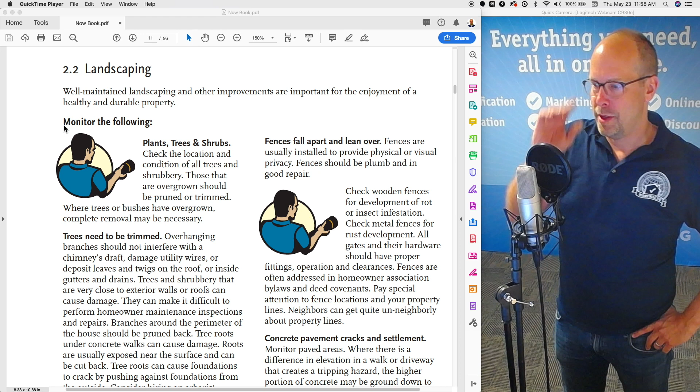During a home inspection, inspectors look at the surrounding areas of a house. Let's talk about landscaping, and maybe steps as well. Well-maintained landscaping and other improvements are important for the enjoyment of a healthy, durable property. InterNACHI believes that every home should be inspected every year as part of a homeowner's routine home maintenance plan.

During a home inspection, we should check the plants, the trees, and the shrubs, and the location and condition of all the trees and shrubbery that may affect the house. InterNACHI has a free online How to Inspect Trees course for members. You may be interested in learning a bit more than you need to know, because you don't need to inspect the entire site and environment during a home inspection according to the Home Inspection Standards of Practice. But you may want to look at what's up close and against or near the house structure.

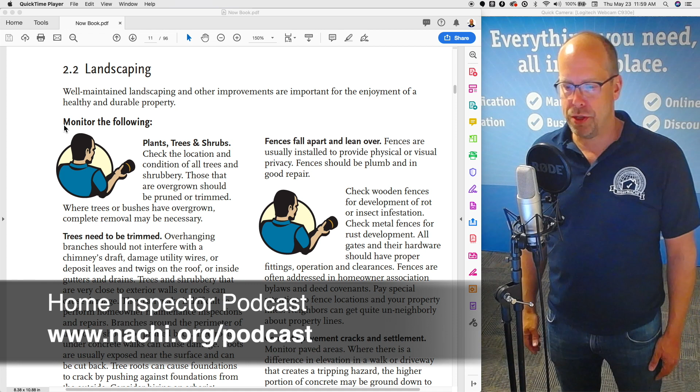Things that are overgrown should simply be pruned and trimmed, and that's a great recommendation. Where trees or bushes have overgrown, complete removal may be necessary for good home maintenance. Trees simply need to be trimmed. Overhanging branches should not interfere with a chimney's draft.

They should not damage utility wires or deposit leaves and twigs on a roof or inside gutters and drains. Trees and shrubs that are very close to the exterior walls or roofs can cause damage, and can make it difficult to perform home maintenance inspections and repairs if needed. Branches around the perimeter of a house should be pruned back.

Tree roots under concrete walks can cause damage. Roots are usually exposed near the surface and can be cut back. Tree roots can cause foundations to crack by pushing against them from the outside. Homeowners should consider hiring an arborist, a specialist in the cultivation and care of trees and shrubs, including tree surgery, diagnosis, treatment, and prevention of tree disease, and the control of pests.

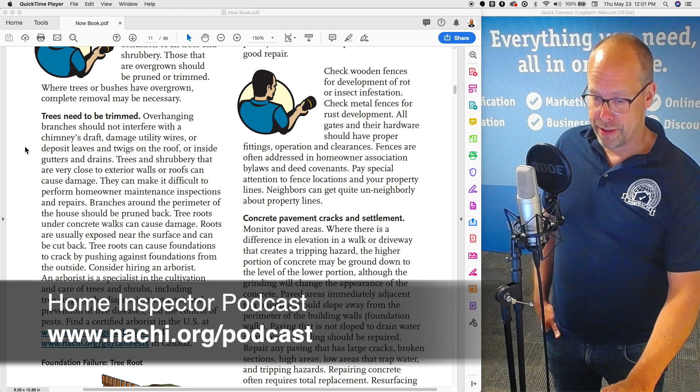Now, fences, over time, fall apart and lean over. And that's a good thing to tell my home inspection clients. Fences are not part of a home inspection. I may look at them only out of courtesy.

I will incorporate them when inspecting a swimming pool, spa, or hot tub. And if I know my clients have pets, dogs, and small children, I'll take a look at the fence. Or if my client asks me to look at the fence, I'll document my observations. Fences are usually installed to provide some kind of physical or visual privacy. Fences should be plumb and in good repair.

As a home inspector, I'll check wooden fences for the development of rot or insect infestation. I'll check metal fences for rust development. I'll check all gates and their hardware, which should have proper fittings, operation, and clearances.

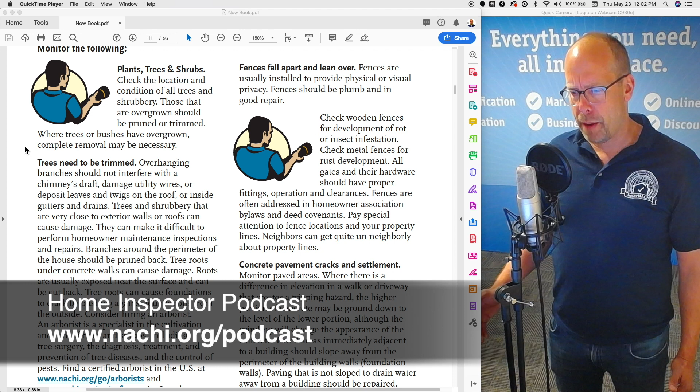Fences are often addressed in a homeowner association bylaw or deed covenants. Pay special attention to fences and locations and property lines. Neighbors can get quite unneighborly about property lines. So property lines and things like that with fences, that's not part of a home inspection. It just makes sense.

Concrete pavement cracks and settlement, those areas need to be monitored. All paved areas need monitoring. Where there is a difference in elevation in a walk or driveway that creates a tripping hazard, the higher portion of the concrete may be ground down to the level of the lower portion, although the grinding will change the appearance of the concrete.

Paved areas immediately adjacent to a home should slope away from the perimeter of the building and foundation walls. Paving that is not sloped to drain water away from a building should be repaired. Repairing any paving that has large cracks, broken sections, high areas, low areas that trap water, and trip hazards are needed. Repairing concrete often requires total replacement.

Resurfacing with a thin layer of more concrete can't repair concrete - it never works. Concrete should be no less than 3 inches thick, and that thin resurfacing is just like a Band-Aid. Cracks in concrete can be cut open and sealed with a flexible sealant compound, which will extend its service life. For sidewalks that have settled downward, it may be possible to lift up sections.

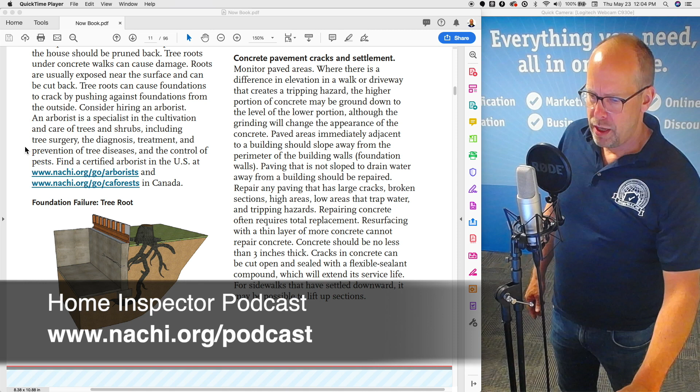Asphalt: sealing asphalt paving can extend its life. Homeowners should seal coat their driveways every 3 to 5 years or so, and examine the paving to determine when sealing is needed, if at all. Check asphalt driveways for sunken areas that hold water or may hold water during a home inspection, or really large open cracks. Low areas in asphalt paving can be brought to level with an asphalt repair, and they work pretty well.

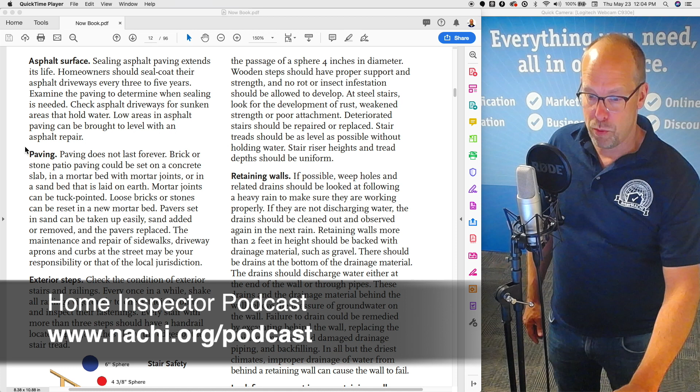Paving doesn't last forever. Brick or stone patio paving could be set on a concrete slab, in a mortar bed with mortar joints, or in a sand bed laid on the earth. Mortar joints can be tuck pointed, and loose bricks or stones can be reset in a mortar bed. Pavers set in sand can be easily taken up, sand added or removed, and the pavers replaced.

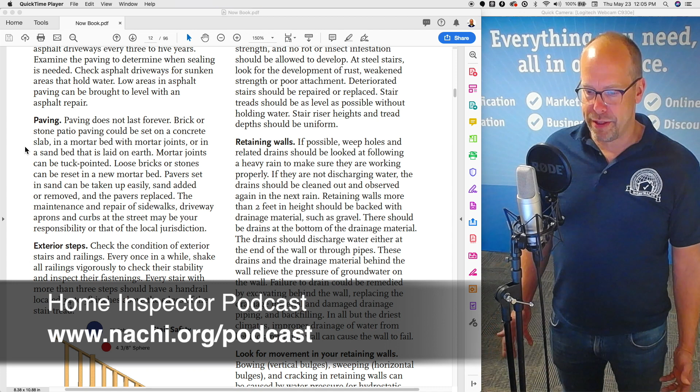The maintenance and repair of sidewalks, driveway aprons, and curbs at the street may be the responsibility of the homeowner or of the local jurisdiction.

Exterior steps. The condition of exterior stairs and railings is important. If any component of a stairway is deteriorated, it can be hazardous, and a fall could be fatal. Every once in a while, the homeowner should shake all the railings vigorously. During a home inspection, I do that, checking their stability and inspecting their fastening.

Every stair with more than 3 steps should have a handrail, but that's a code thing. I believe the IRC says 4 risers, some codes say 3. Many home inspectors, myself included, are not code inspectors, and therefore our opinion matters. My opinion is, if there's 1 or 2 steps that may be difficult for an 85-year-old grandmother to step up without a handrail, I'll put that recommendation in my report.

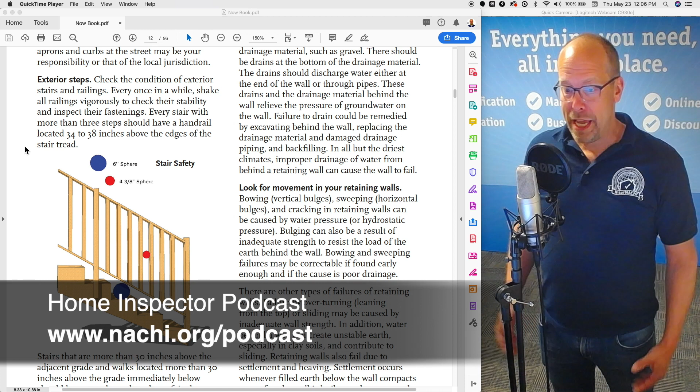The handrail should be located 34 to 38 inches above the edges of the stair tread. It's really a code thing and local code.

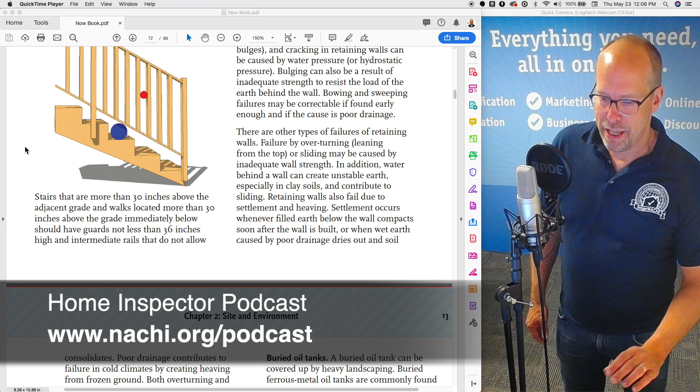Stairs that are more than 30 inches above the adjacent grade, and walks located more than 30 inches above the grade immediately below, should have guards not less than 36 inches high, and intermediate rails that do not allow the passage of a sphere 4 inches in diameter.

So 30 inches high. If you have a landing at the top of a stairs or a deck that's 30 inches high, for me as a home inspector, I'm not a code inspector, so I'll look for something that's kind of high. Sometimes it's 20 inches, 24 inches, because I'm not a code inspector.

So I may recommend that this deck here in the back that is 28 inches above the grass needs a guard. Now, they don't have to follow my recommendations, they don't have to put a guard there, but I'm going to put that in the report. And also the intermediate rails, right? The spindles, the little vertical things in the guard - you can't have a 4-inch sphere pass through it.

Now, some people will say that the home was built to code with a larger opening to allow a larger sphere to pass through 30 years ago, so it's grandfathered. Well, a child falling through the railing doesn't care if the house was grandfathered in or not. Doesn't make any sense. Has no relevancy on protecting children and people from being injured.

So if you're interested in protecting children from injury and preventing injuries from happening, and people getting hurt or property getting damaged, you may want to reflect upon the modern building standards - I won't say code - and incorporate that into your inspection process, your observations, and how you write your report.

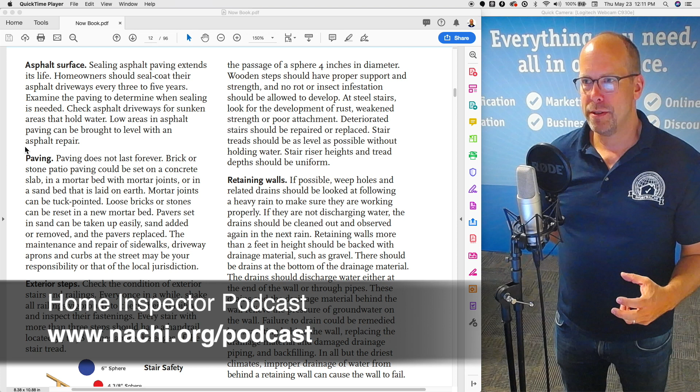It's vital, critical, that stairs are in great shape. When you trip on a step, it's unexpected, and if you're old enough, you may have this knee-jerk reaction to grab onto a handrail. Little kids tend to not have learned that yet, so they may fall. So we want those stairs, steps, rails, guardrails, and spaces to be in good shape as much as possible.

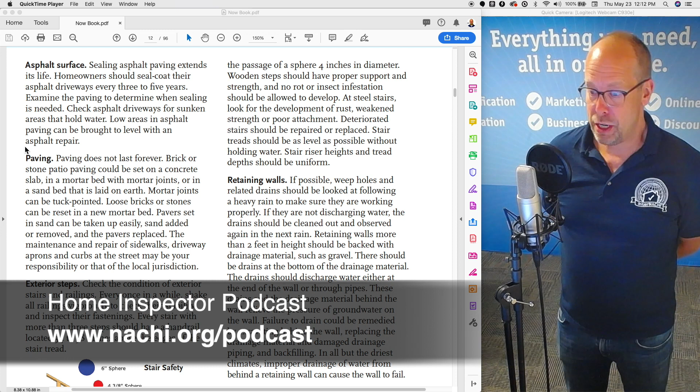Stair treads should be as level as possible without holding water, and stair riser heights and tread depths should be uniform. Now, retaining walls: if possible, weep holes and related drains should be looked at following a heavy rain to make sure that they are working properly.

That's a good recommendation from a home inspector to a homeowner. If they're not discharging water, the drains may be clogged. They should be cleaned out and observed again in the next rain, or it could be tested with a garden hose. Retaining walls more than 2 feet in height should be backed with drainage material such as gravel.

There should be drains at the bottom of the drainage material, and the drains should discharge water either at the end of the wall or through pipes. These drains and the drainage material behind the wall relieve the hydrostatic pressure of groundwater on the wall. Failure to drain could be remedied by excavating behind the wall, which is expensive, replacing the drainage material and damaged drain piping and backfilling. In all but the driest climates, improper drainage of water from behind a retaining wall can cause the wall to fail.

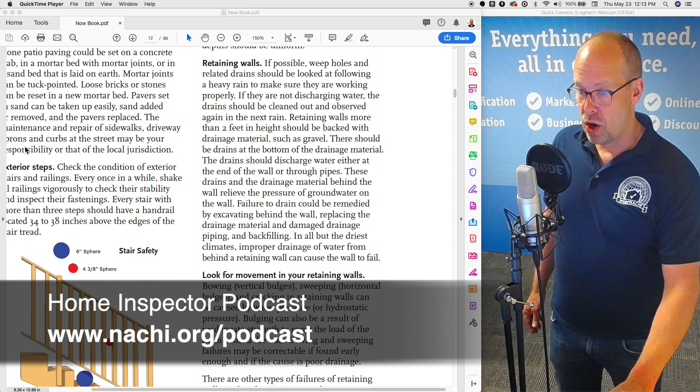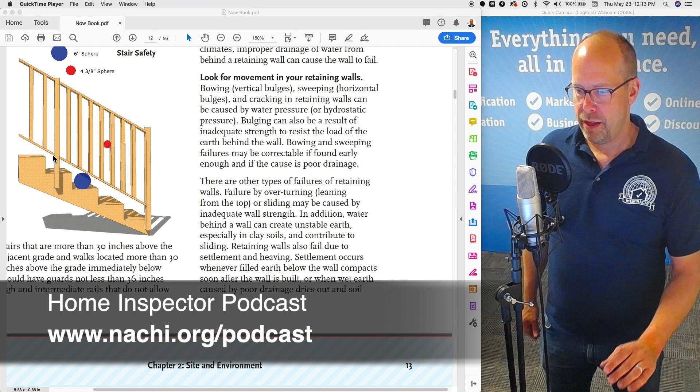During the home inspection, look for movement in the retaining walls. Bowing or vertical bulges, sweeping or horizontal bulges, and cracking in retaining walls can be caused by water pressure or hydrostatic pressure. Bulging can also result from inadequate strength to resist the load of the earth behind the wall. Bowing and sweeping failures could be corrected if found early enough, and if the cause is just poor drainage.

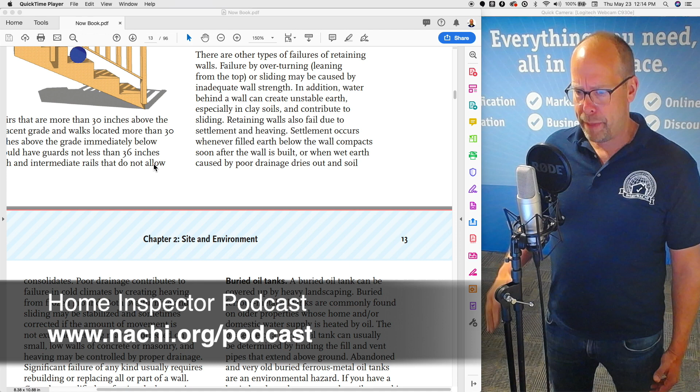There are other types of retaining wall failures: failure by overturning, leaning from the top, or sliding, which may be caused by inadequate wall strength. In addition, water behind a wall can create unstable earth, especially in clay soils, and contribute to sliding. Retaining walls also fail due to settlement and heaving. Settlement occurs whenever filled earth below the wall compacts soon after the wall is built, or when wet earth caused by poor drainage dries out and the soil consolidates. Poor drainage contributes to failure in cold climates by creating heaving from frozen ground.

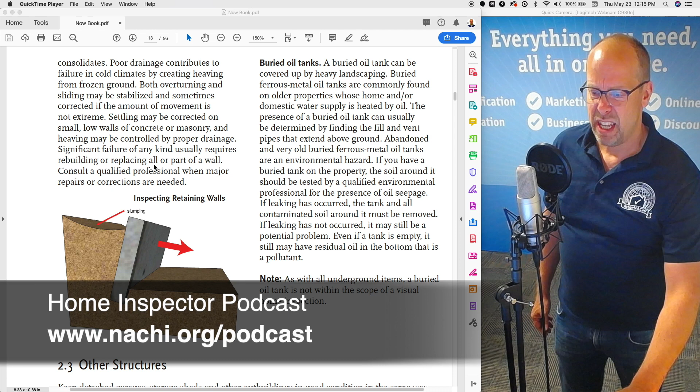Both overturning and sliding may be stabilized and sometimes corrected if the amount of movement is not extreme. Settling may be corrected on small, low walls of concrete or masonry, and heaving may be controlled by proper drainage. Significant failure of any kind usually requires rebuilding or replacing all or part of the wall, so a qualified professional should be consulted when major repairs and corrections are needed.

Buried oil tanks: a buried oil tank can be covered up by heavy landscaping, like ivy or ground covering, trees, or pine needles that fall. Buried ferrous metal oil tanks are commonly found on older properties whose home and/or domestic water supply is heated by oil. The presence of a buried oil tank can usually be determined by finding the fill and vent pipes that extend above the ground. Abandoned and very old buried ferrous metal oil tanks are an environmental hazard, a material defect.

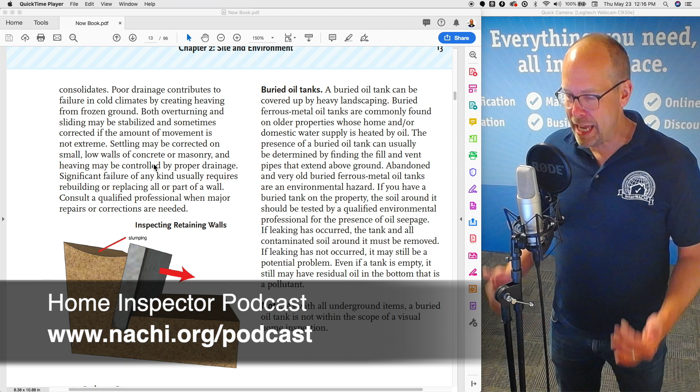If you have a buried oil tank on the property, the soil surrounding it should be tested by a qualified environmental professional for the presence of oil seepage. If leaking has occurred, the tank and all the contaminated soil around it must be removed, and this is highly regulated. If leaking hasn't occurred, it may still be a potential problem. Even if a tank is empty, it may still have residual oil in the bottom that is a pollutant, and that needs to be handled. Again, this is highly regulated.

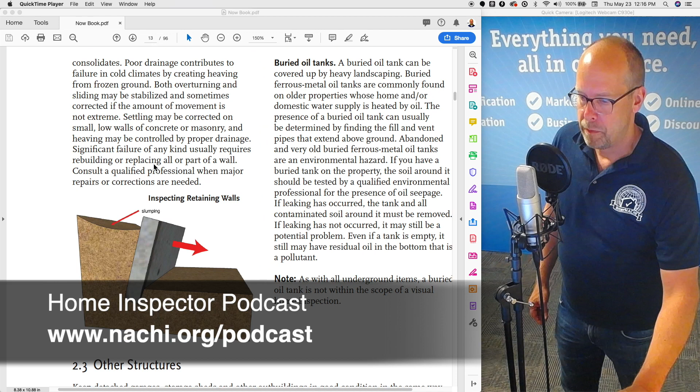As with all underground items, a buried oil tank is not within the scope of a visual home inspection.

Other structures: a homeowner needs to keep detached garages, storage sheds, and other outbuildings in good condition in the same way that their home is maintained. As a home inspector, you're not required to inspect these systems, components, or structures. A homeowner should monitor each building's water shedding capability and the adequacy of its foundation.

During a home inspection, you could look for roof leaks from inside the buildings. Wood frame structures could be checked for rot and insect infestation. The doors and windows could be checked, just to provide adequate weather protection and security for the buildings.

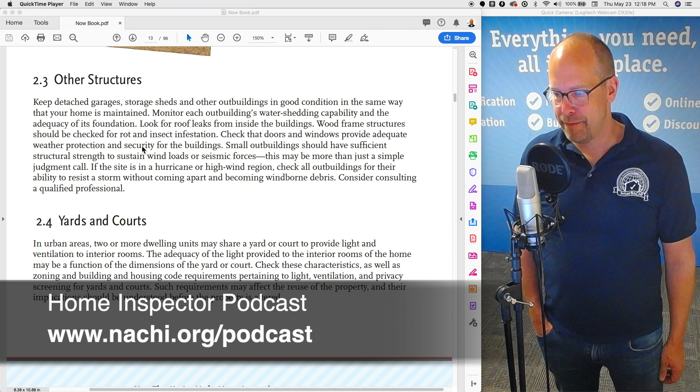Small outbuildings should have sufficient structural strength to sustain wind loads or seismic forces, depending on location. This may be beyond the standard home inspection. If the site is in a hurricane or high wind region, check all outbuildings for their ability to resist a storm without coming apart and becoming windborne debris. Consider consulting a qualified professional for this type of inspection.

Yards and courts: in urban areas, two or more dwelling units may share a yard or court to provide light and ventilation to interior rooms. The adequacy of light provided may depend on the dimensions of the yard or court. These characteristics, as well as zoning and building and housing code requirements pertaining to light, ventilation, and privacy screening for yards and courts, can be checked by the homeowner. Such requirements may affect the reuse of the property, and their implications should be understood before the property is altered.

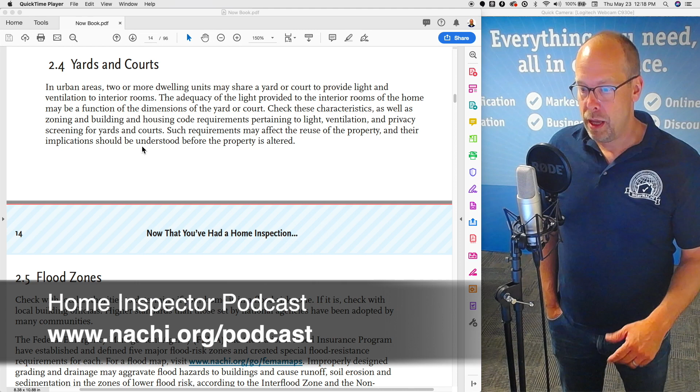Flood zones: a homeowner should check with local authorities to determine if the home is in a flood risk zone. If it is, they should check with local building code officials, since higher standards than those set by national agencies have been adopted by many communities. FEMA, the Federal Emergency Management Agency, and the National Flood Insurance Program have established and defined five major flood risk zones and created special flood resistance requirements for each. There is a flood map on the FEMA website. Improperly designed grading and drainage may aggravate flood hazards to buildings and cause runoff, soil erosion, and sedimentation in zones of lower flood risk. In these locations, local agencies may regulate building elevations above the street or sewer levels.

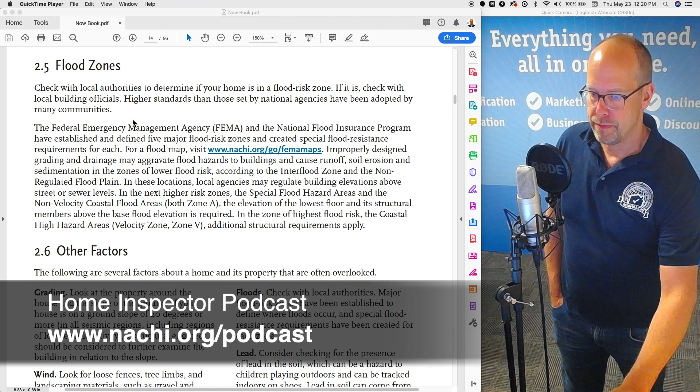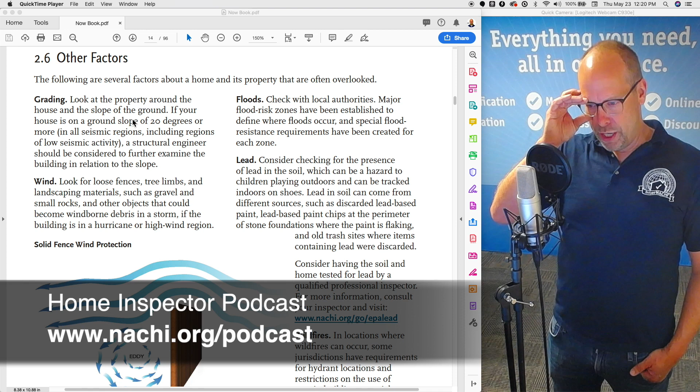There are other factors that impact a home's health on the outside. The following are several factors about a home and its property that are often overlooked. The grading: look at the property around the house and the slope of the ground. If the house is on a ground slope of 20 degrees or more in all seismic regions, including regions of low seismic activity, a structural engineer should be considered to further examine the building in relation to the slope.

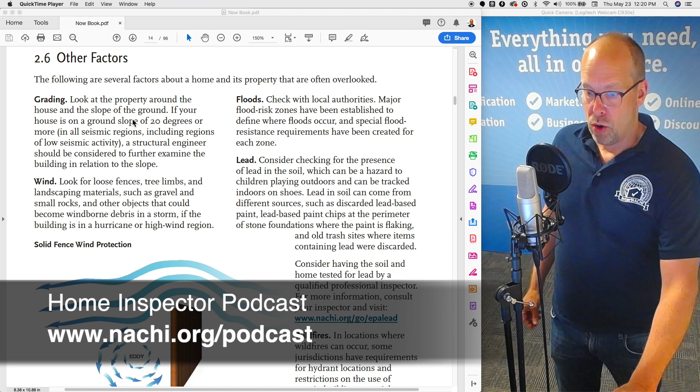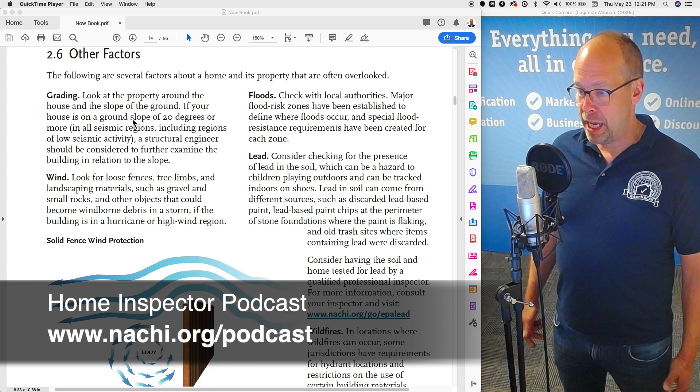That's really steep. Wind: look for loose fences, tree limbs, and landscaping materials such as gravel and small rocks and other objects that could become windborne debris in a storm if the building is in a hurricane or high wind region. Floods: the homeowner should check with local authorities. Major flood risk zones have been established to define where floods occur, and special flood resistance requirements have been created for each zone. Lead: consider checking for the presence of lead in the house paint and in the soil surrounding the house, which can be a hazard to children playing outdoors and can be tracked indoors on their shoes. Lead in soil can come from different sources, such as discarded lead-based paint chips at the perimeter of stone foundations where the paint is flaking, and old trash sites where items containing lead were discarded in the past.

The homeowner should consider having the soil and the home tested for lead by a qualified professional inspector. InterNACHI has several free online courses to help you gain knowledge related to inspecting paint in a home, lead-based paint, and hazards.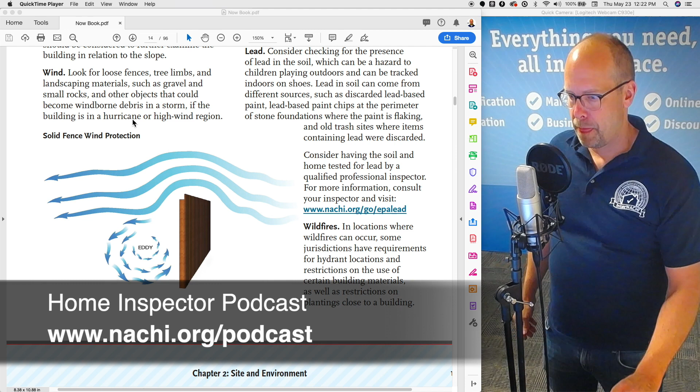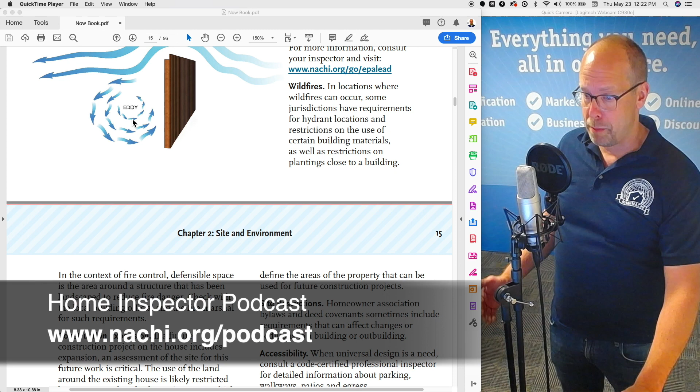Wildfires: in locations where wildfires can occur, some jurisdictions have requirements for hydrant locations and restrictions on the use of certain building materials, as well as restrictions on planting close to a building. In the context of fire control, defensible space is the area around the structure that has been landscaped to reduce fire danger. It's been cleaned out. Check with a local building official and fire marshal for such requirements.

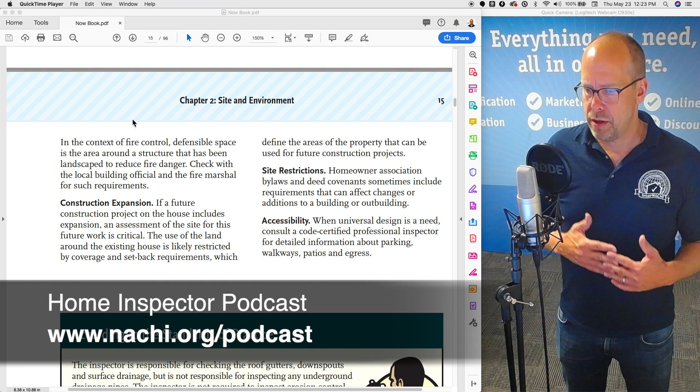Construction expansion: if a future construction project on the house includes expansion, an assessment of the site for this future work is critical. The use of the land around the existing house is likely restricted by coverage and setback requirements, which define the areas of the property that can be used for future construction projects. Site restrictions: homeowner association bylaws and deed covenants sometimes include requirements that can affect changes or additions to a building or outbuilding. And finally, accessibility: when universal design is needed, consult a code-certified professional inspector for detailed information about parking, walkways, patios, and egress.

According to the standards of practice, the home inspector is responsible for checking the roof gutters, downspouts, and surface drainage, but is not responsible for inspecting anything underground, like underground drainage pipes. The inspector is not required to inspect erosion control, earth stabilization measures, or geological or soil conditions. Those are beyond the standards of practice.